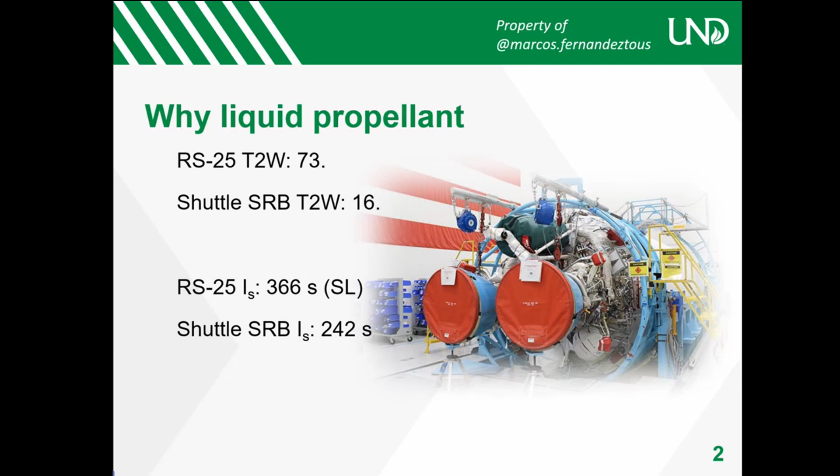However, take into account that in all propulsion, there is a balance between thrust and specific impulse. So if we have high thrust here, lower specific impulse; if you go to higher specific impulse, using, for example, nuclear and electric, you will have less thrust. In other words, chemical propulsion is the only means we have to escape Earth, because as you know, we need on the ground more or less 11 kilometers per second. And that's something that we cannot avoid, okay? Questions so far?

Okay, so liquid chemical propulsion history. Who has heard about Tsiolkovsky? Okay, some people there in the back.

Normally, the people who are in the back, in my days of high school, are the ones who knew less, but here I see it's the contrary, so it's okay. They are in the front. They are in the front on the other side. I am the one who's in the back. That works now. Thank you.

So Tsiolkovsky was deaf. He was Russian, and he was thinking a lot about how to bring rockets into space. I think it was in 1903 or 1904. My memory is not what it used to be, but in any case, he wrote an equation which remained in history as the rocket equation, the equation that we can use to know how much propellant we need to give an impulse, a change in velocity, or if you want delta-V, with a specific impulse. Okay.

Interestingly, there have been other engineers or scientists or thinkers, if you want, who reached the same conclusion apparently without knowing his results, because Tsiolkovsky was a bit away from the intelligentsia in those years in Russia. So it's not that his works were published as soon as he finished them. They took a lot of time to become known. But he remains historically one of the first figures.

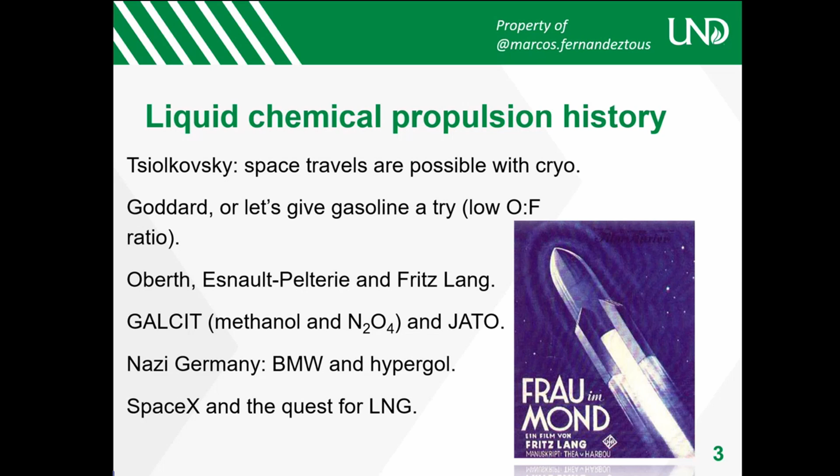So that was the interesting thing, and that's why for the bigger rockets they have, they are not using solids. Don't talk to them about solid propulsion. They don't want to hear about that. So they are going to go for liquid natural gas or liquid methane. Okay, liquid methane is still cryo in the sense that we have to lower the temperature a lot to keep it liquid, but not as low as hydrogen. So it's easier. It's also heavier. Questions or thoughts or ideas? Okay.

So what I'm going to do now is to go part by part. I'm going to explain a bit the ideas, and I prepared this presentation thinking of you, thinking of which ideas from an engineering perspective could be interesting to explore if you want. Okay, just throw it there. So the storage tank is the first thing.

One of the things we said is that it's interesting to have a light propellant. Normally light propellants are less dense, which means tanks are bigger. So first, tanks have to be thicker to keep the high pressure, to keep them liquid, and that is a problem. So we have to find the balance there. Another problem is that once we are in space, as you may imagine, we have no gravity, right?

So somebody was telling me in class in nuclear propulsion today, here you take a bottle of water and you put it upside down and all the water flows down. When you are in space, the water or the liquid you have is going to float inside of the tank. It doesn't mean it's going to go down, unless you have some system which is going to propel the rocket forward or the engine forward, and because of the acceleration, the liquid comes back and it starts the process going through the engine.

But there are things that we have to avoid. One of them, apart from that, is the gas pressurization, which are two systems. As I said, we have to keep high pressures inside. How to do that? One of them is an exogenous system, which is basically using an inert gas, something which is not going to react with hydrogen and oxygen. Obviously, we add it there, like for example, helium or nitrogen.

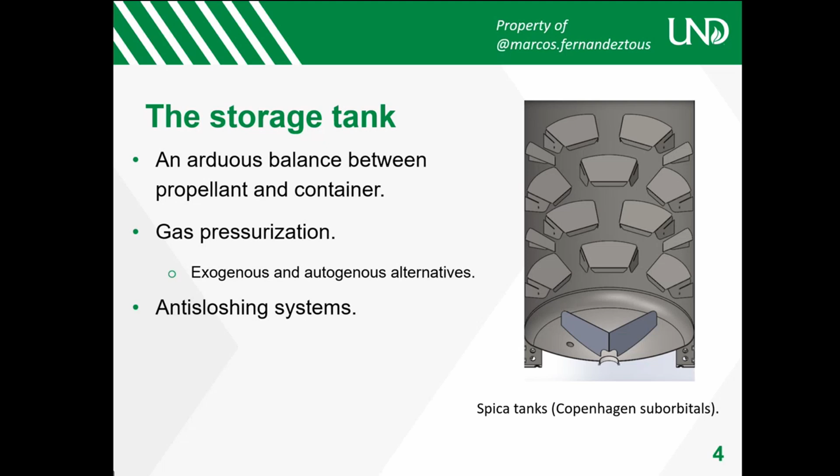Moving forward, the turbopump system. That could be a whole week, and we are not going to spend time there. One of the first things that I asked Dr. Young is if you were going to work with turbopumps, and apparently not. It's a good idea because turbopumps are a project in themselves. They are complicated, but they are very interesting also. Instead of using a gas to push the propellant outside of the tank, it's a way to add pressure to the propellants and the oxidizers that are coming out from the tank before they enter the combustion chamber.

There are a lot of things to talk about there. I don't want to, but one of the ideas that comes to my mind is the problem of cavitation. So do you know what that is? What is cavitation? Anybody?

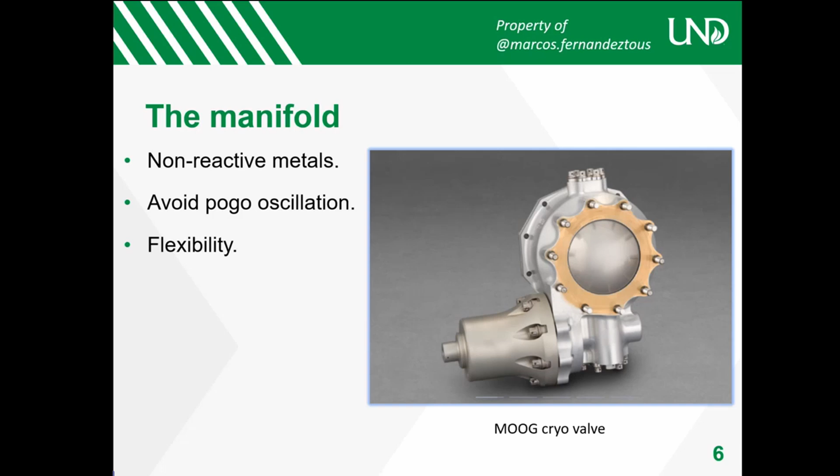Normally, the good thing is that Pogo oscillation, once it was detected, was easy to control, and the frequencies are not that high. We are talking about tens of hertz maximum. Okay. And then the flexibility, obviously, because if there are vibrations, we will need systems to absorb that. And as you know, the best way to absorb vibrations is to have a flexible system, something that is going to be able to come back to equilibrium without breaking. Okay. Questions? Okay.

So, cooling system. Question to you. Are you foreseeing any cooling system for your project? Most likely needing regenerative cooling for sustained burns. Okay, that's great. By the way, I have to tell you that I'm very curious, I would love to see how it works and everything, because I think the idea you have is great.

So normally, with the cooling system, what happens is that if you take the temperature of the gases that we generate in the combustion chamber, or the ones that go through the nozzle, and you see the limits of the material that you are using to build the nozzle or the combustion chamber, you see there's something that doesn't match, because the materials would melt. In order to avoid that, we need something to cool down the system. So basically there are 3 ways to do that. Very basically, radiation cooled.

There are materials which radiate to the outside, especially in the nozzle, which is facing the vacuum of space, part of that excess heat, so that we are not going to concentrate it there, or at least for us up to a certain amount of time, it's going to work. Radiation, you know what it is. I don't have to explain that.

Regenerative cooled, basically, and this idea is not new. Even Goddard, if you look at his first sketches and his first experiments, he was introducing that. So basically, you take the nozzle and you add to the sides of it tubes where you are going to have the propellant, which is cold, through it. What happens is that the propellant is in contact with the walls of the nozzle. They absorb part of that heat through conduction. It comes through the propellant. The propellant becomes gas, and now it would be able to move the turbine. So it's a system that feeds itself.

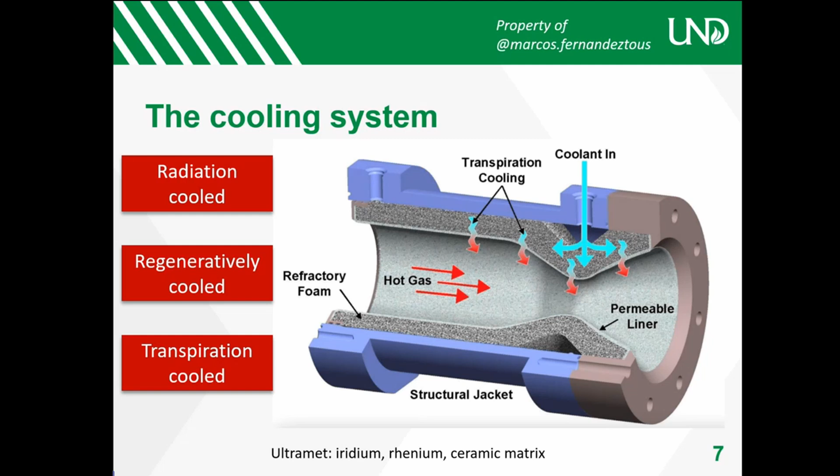Okay. Another system obviously used when you are ready to lose a bit of propellant. In that sense, I don't think it could be applied to big rockets or rocket engines, but it could work in the small designs as well. It's interesting. The combustion chamber, where the action happens.

So that's interesting. Now, if these holes are done at an angle so that the oxidizer and the fuel meet too close to the injector, the heat stress that the injector has to resist will be too high. So they try to be a bit far away from that, which unfortunately might make the combustion chamber a bit longer.

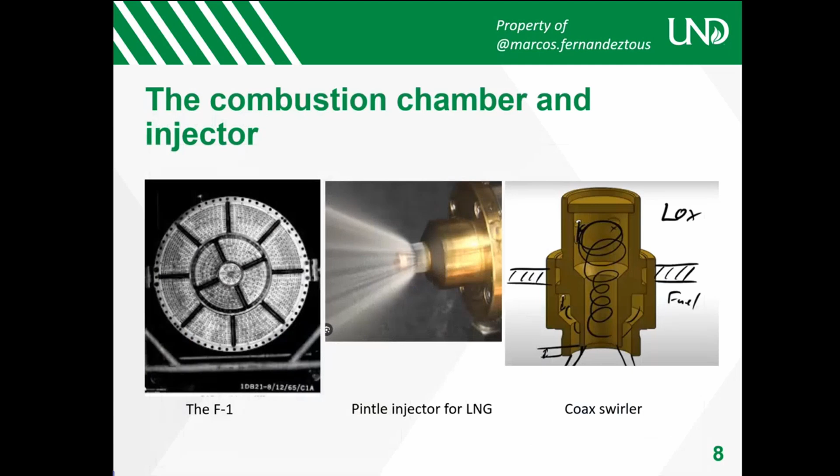So what happens when you have a supersonic flow and you increase the area? The velocity goes up, right? And the pressure goes down. So velocity and pressure always go in different directions. So velocity goes up, which means that in the end you end up having more specific impulse. That's what we want, okay?

Obviously, there is another factor here. I'm not going to enter into details, but as you may imagine, this velocity will depend on the background pressure we are having. As you may imagine, here at sea level, or more or less at sea level, we are having maximum pressure. As we go up, the pressure goes down. So that means that the specific impulse increases as we are going up.

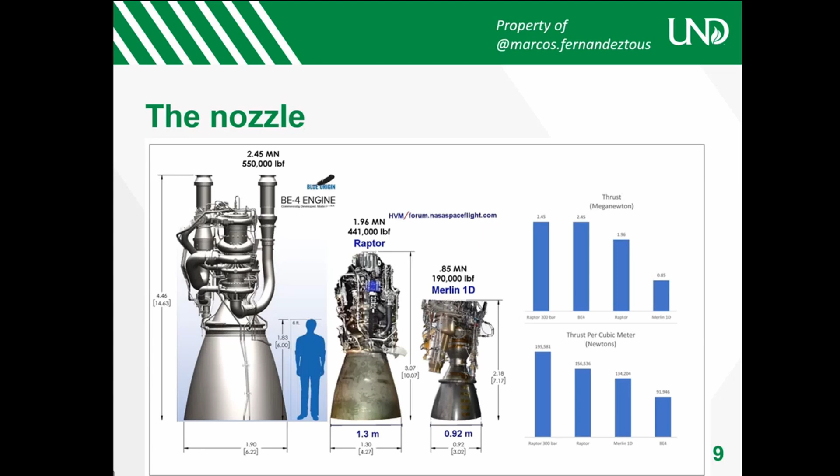Okay, that means that when we were talking about specific impulse before, we have to say, what are you talking about, sea level or vacuum? It's not the same. In vacuum, there is no resistance for the gas to leave the nozzle, right? There's no pressure, there's no air, there's nothing. Here, yes. Okay, without entering into detail, but there are things to consider.

So, things that I wanted just to throw at the end of this presentation, some ideas in here to say there is research that we are interested in, but we are just starting, and just to say that there are things that will be cool to think about. We talk about the combustion chamber, the atomization, to make the droplets as small as possible, to maximize also the mixing, the vaporization. I mean, the smaller the droplet, the easier it's going to be to become gas. When it's gas, it's much easier to start the combustion process.

Diffusion of the droplets inside of the combustion chamber. Turbulent versus laminar, heat transfer, how the heat is transferred within the combustion chamber towards the walls. What can we do to protect the walls? Sometimes the walls inside of the combustion chamber have film cooling, which is propellant itself being dropped through the walls, and the energy that it takes to vaporize that propellant will not reach the walls themselves. So we are protecting the walls, basically. Okay. Instabilities like screeching, which is the high frequency instabilities I was talking about before.

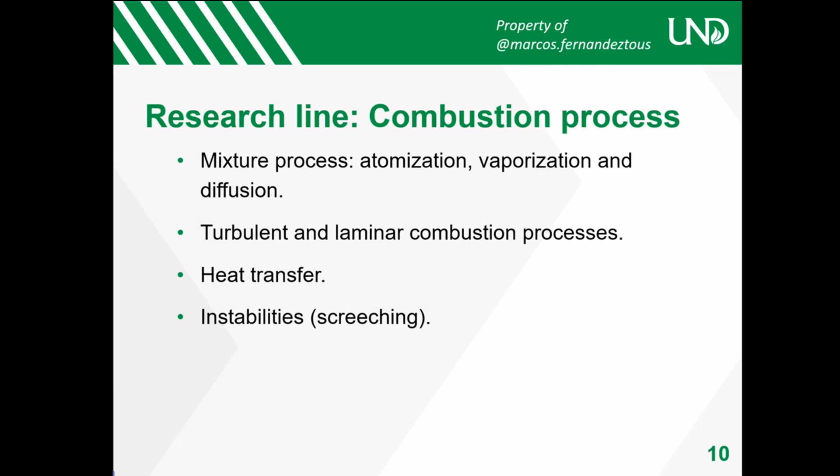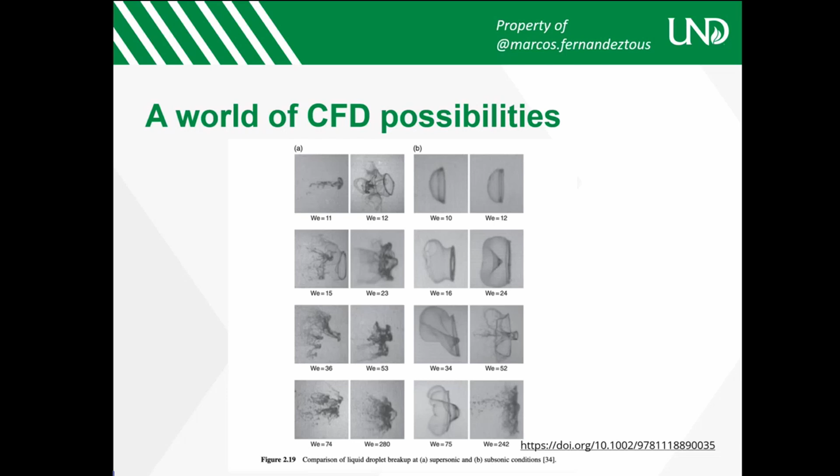If you like CFD, I'm not an expert there, but I tell you that there are many things to do. That came from a study, and they were analyzing the droplet mixing process, liquid droplet breakup between supersonic and subsonic conditions. And it's not that I wanted to go there into details because I don't know them, but basically it's to tell you that CFD techniques, as you may imagine, are very much applied here.

Another possibility is to analyze the stresses, okay? Nozzles are big structures. They are going very fast. Thermodynamic stress also adds to the mechanical stress. Are we going to be able to resist all that energy there? So we can do simulations in ANSYS or something to see whether different materials would work or not. Obviously, the idea is to optimize that. By that, I mean that there are areas which will have maximum stress.

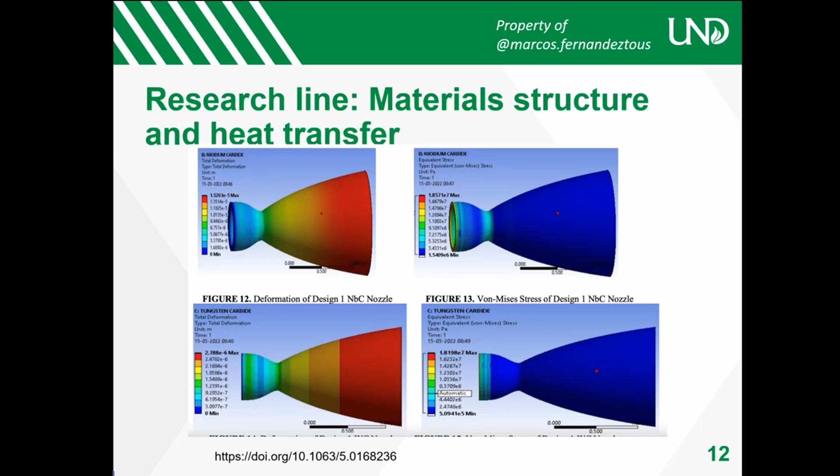For example, for temperatures, the maximum temperature is here. The throat has the minimum area, and there is a lot of friction there. There's a lot of temperature. There's a lot of heat transfer in a small area. We have to reinforce that area. Reinforcing that is less important. So it is, but it's less. So we can do that, okay?

And then after that, well, I just put green monopropellants because, without going into too much detail, monopropellants, do you know what they are? You want to share? I'm sharing. Mono means single, right? So in that case, it's a bachelor. It means that instead of having oxidizer and fuel, we just have one propellant, which is being decomposed using a catalysis effect. The decomposition of a propellant will release energy also. In general, that energy is lower than bipropellants because it's not a reaction as we have, it's just the decomposition.

However, in the small satellites where it's much more complicated to deal with two tanks and everything, sometimes monopropellants are used. An example of that is hydrazine, which can also be hypergolic. You can use a catalytic bed. You make it cross. I don't know what the material of these beds is made of, but they react in contact with certain metals, certain elements, and they decompose and they heat up. And then we can have also propulsion because of that.

Human activity, well, that has to do more with the ablative process. Apparently, I took that from the internet. So SpaceX last year blew up rocket engines in the high layers of the atmosphere. Recently, some researchers, I think from Russia, have detected that this explosion created some instabilities in the ionosphere, a bit higher than the stratosphere. They made a hole, and they provoked apparently a lot of problems there that it will be interesting to analyze. That has to do with chemical reactions that happen there and everything.

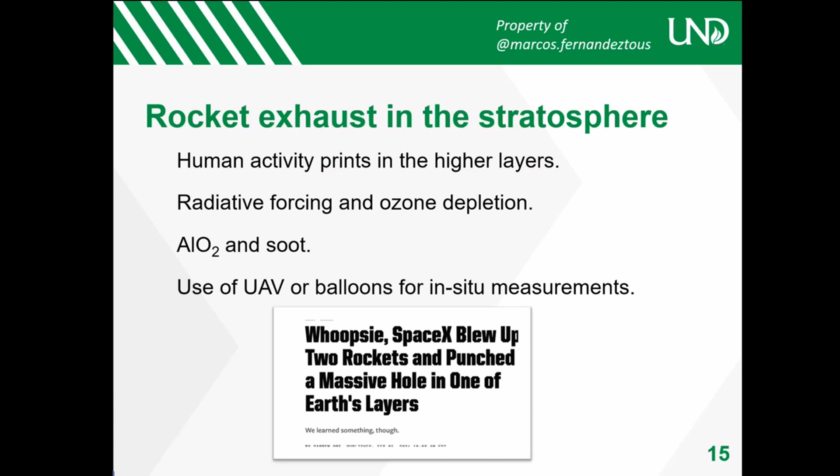Okay. As I said, UAVs or balloons would be ideal to go there and see what are the effects. Rockets are becoming more and more normal, right? So we are going to have more travel to space, we're going to have more traffic there. What is going to be the effect of all that?

And I think you know that the Orion capsule came. The last news I have from Pablo is that, because it doesn't fit, as you may imagine, in many buildings, they are trying to put it outside of Clifford. They are trying to sandblast it now because it has been outside for a long time. It has never flown to space. They were using it just for tests, okay? But they wanted to clean everything as much as they could.

In addition to that, as you know, we have the H1, one of the engines from Saturn 1B. That is being cleaned now. So everything very cool.